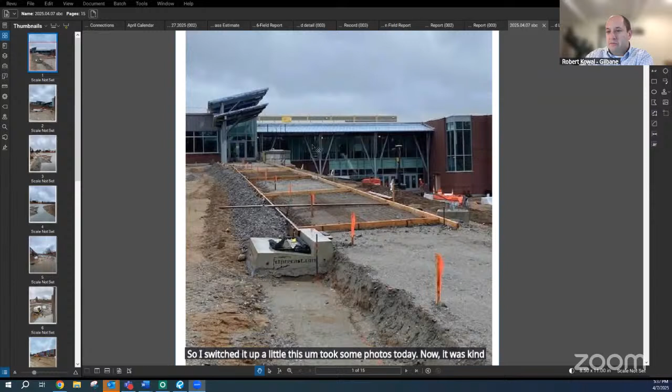So I switched it up a little this meeting. Took some photos today. It was kind of a rainy, not a beautiful day out there, but I figured we're moving along so quickly right now that if I try to share images from a week or two weeks ago, they'd be outdated and really wouldn't do it justice where we are.

So just starting outside, this is looking at the main entrance. We'll do a little tour on the outside and you'll see the progress we've made with the site work and finishes over the last couple of weeks. We have this sidewalk formed now and ready to place, going up to the main entrance. Behind me, we did the little ornamental stair, a stair down from this upper level to the lower level. That's all done and ready for railings at this point. So we're making good progress here.

We are working on these canopies. It's a little hard to tell, but this upper canopy is basically done with the metal roofing, and we're going to continue on. The roofers weren't on site today, but we're expecting them back, and in the next week we'll have the metal roofing done on the canopies surrounding the building.

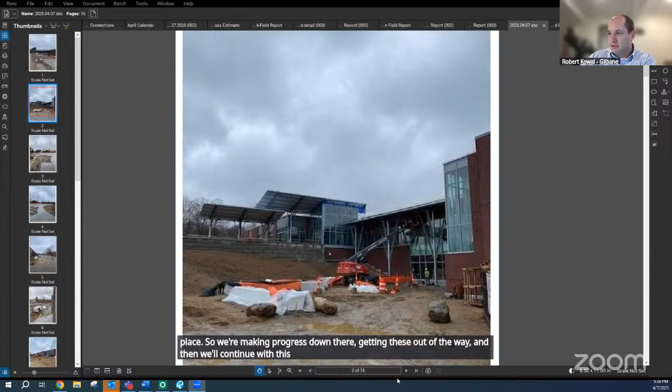Moving on, now this is looking up at the main entrance. It's a little hard to tell, but these items under the tarps and plastic are the ornamental bench seats, the seat walls down at the lower area by the cafeteria. These are actually installed and protected right now because of where we are construction-wise, but we've worked on the foundations for these and they're basically set in place. So we're making progress down there, getting these out of the way, and then we'll continue with this entrance area and the flat work and sidewalks required.

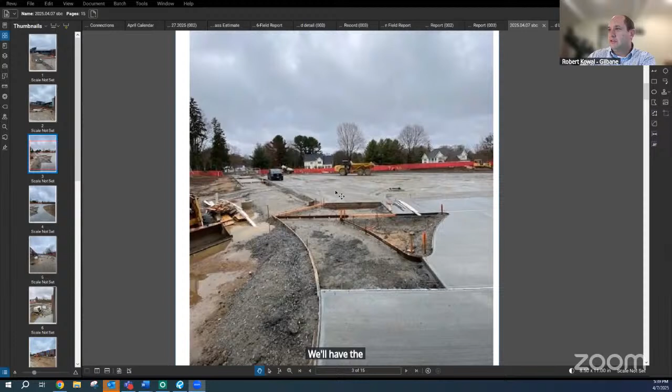So now I jumped over, and Mungertown Road is to my left right here. We're looking at the north entrance to the site, and what you can see here is more sidewalks placed. These sidewalks out to the main entrance will be done this week, weather cooperating, and we'll have the concrete in place. Through the parking lot, it's based out and basically getting ready, almost ready for pavement. We've been working on putting material in place and grading this, getting it ready for fine grading and prep for pavement.

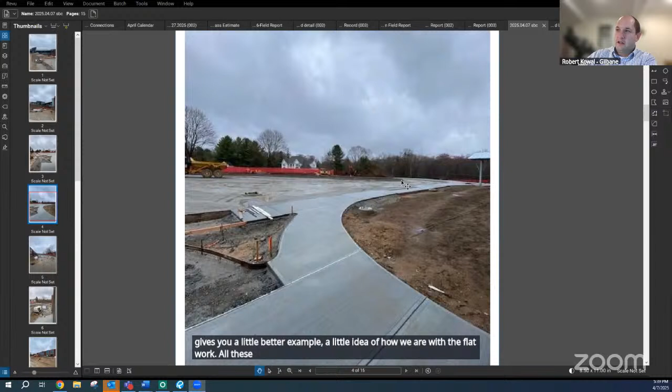Now this is looking a little to the right, towards where the well fields are in that lower area, and shipping and receiving. This gives you a better idea of how we are with the flat work. All these sidewalks are installed, and again the parking lot's prepped. You'll see in a future photo that the curbing around this radius area is done as well. It's a little hard to see in the photo, but the flat work and concrete is done.

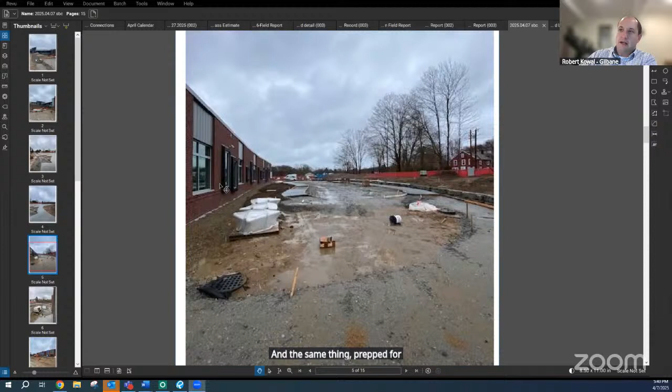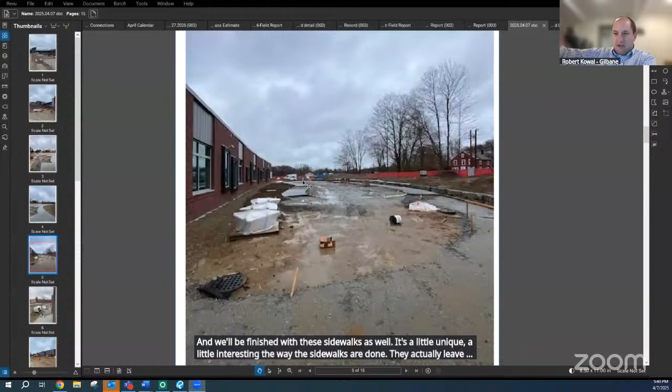Now I just spun 180 and I'm looking down at where the pre-K and kindergarten playground is, and the same thing, prepped for sidewalks. We'll be working on the last element here, these fiber cement surrounds on these windows, probably in about two weeks, but these should be done right around the first of May, and we'll be finished with these sidewalks as well. It's a little interesting the way the sidewalks are done - they actually leave out sections, almost hopscotch. They'll place a couple panels and then come in and fill in between them. That's why you'll see a break here, but there's a panel here and a panel here.

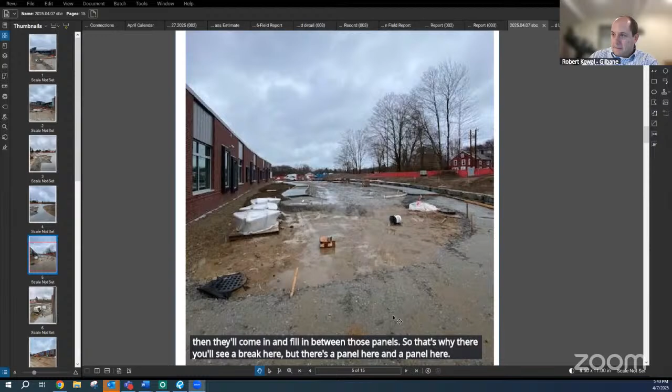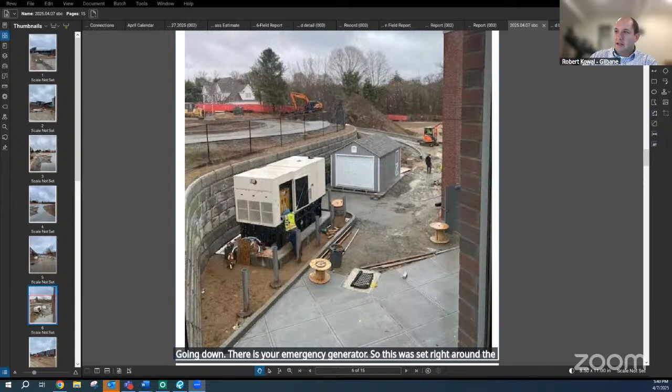Going down, there is your emergency generator. This was set right around the first of April, last week of March, and this shed was actually set this morning. So we have the shed on site. This is looking down at the shipping and receiving area, and if you look up you can again see the curbing in place, and we're getting prepped for the binder course of pavement.

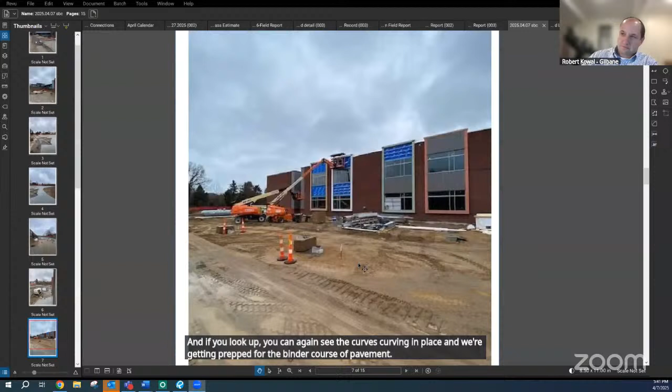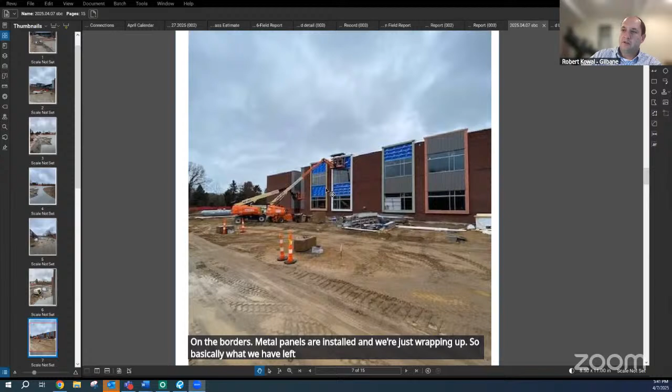So now I jump to the east side of the site. Daniel Hand is sort of basically at my back, and you can see that we're finishing up the exterior here. These are the fiber cement surrounds on the borders. Metal panels are installed and we're just wrapping up. What we have left is to finish these sections of metal panels, which should be complete by the end of the week if weather holds and we don't have any impact with really heavy rain.

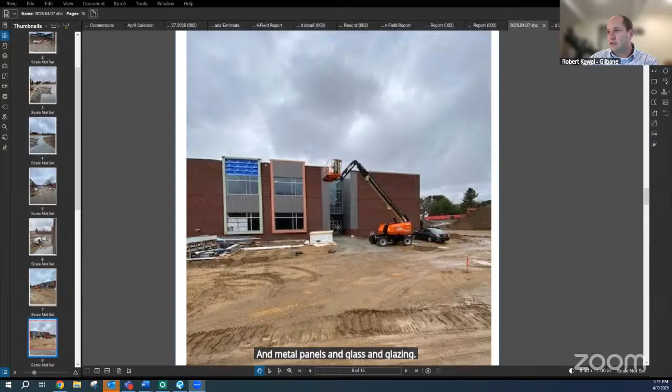And then this is just another example, gives you a little better shot at the entrances to that lower level and the metal panels and glass and glazing at the 2 entrances. Behind me, we're actually working on concrete down at the bottom as well. They're starting to form the concrete curbs that are required at the perimeter of the upper grade playground.

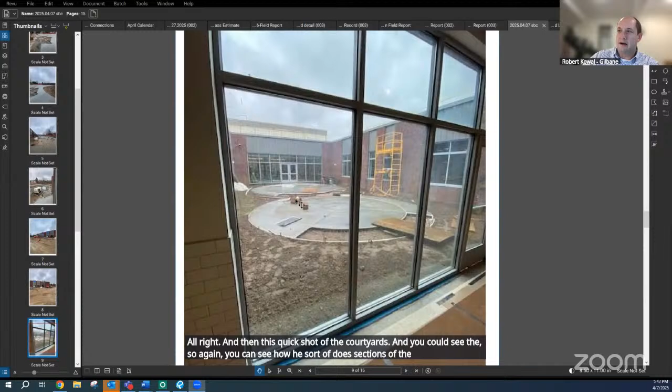And then this quick shot of the courtyards. You can see how he sort of does sections of the concrete. We basically have our last 2 sections left to place of the courtyard with the flat work.

So now I jumped inside. We're looking at the gym, and what these gentlemen are doing here are prepping for the fluid applied gym floor. You can see we installed the wall panels, the majority of the wall panels. We've put those in before so we didn't have to work on the fluid applied floor.

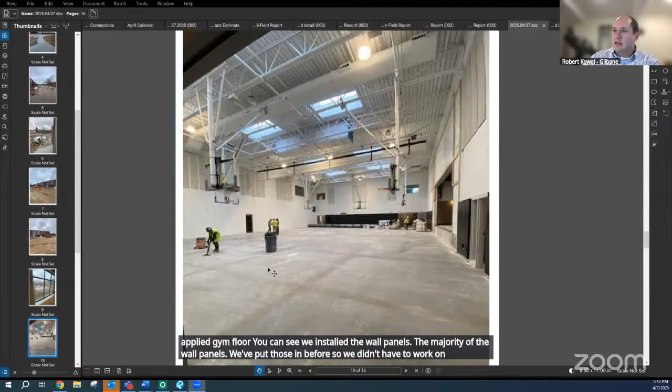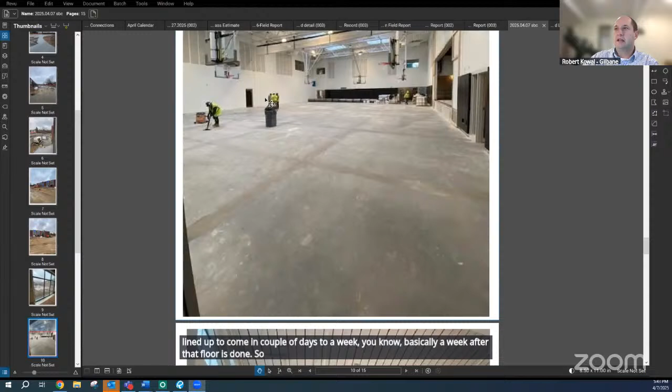In about the next 3 weeks, these gentlemen, the flooring crew, will be in here putting down this gym floor. That'll be a big item to have completed. And then we have the bleachers lined up to come in a couple of days to a week, basically a week after that floor is done. That's already been coordinated, and we have the date when the bleachers will come in and be installed along this wall.

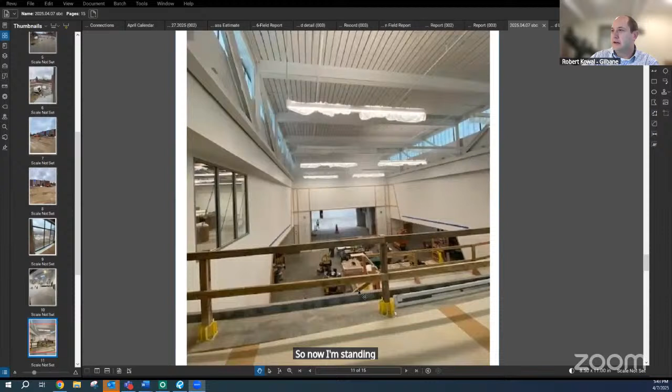So now I'm standing in the main corridor up on basically area A, looking down. This is the cafeteria. Just to give you a feel, permanent lighting is on, so these are the actual lights energized. You can see we're starting to do the finishes around the platform. When you're down in the cafeteria, you do look up at these acoustical wall panels and this acoustical detail that's on the wall by the platform. You can see the glass windows are in.

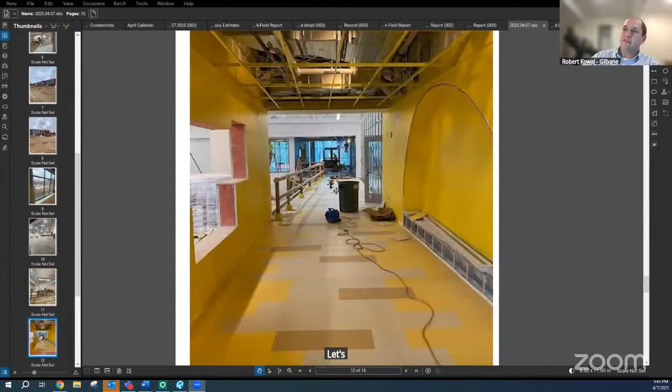I believe this is the art room here. You'll see better, but the floor is in as well. So now I was standing basically right by this trash can in the last photo, but this gives you a good shot at that main corridor.

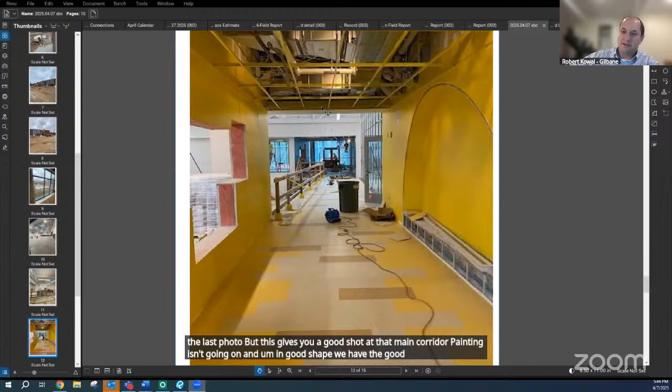Painting is going on and in good shape. We have the architectural ceiling tile and ceiling grid installed at both ends. This is a yellow, and then it's the main entrance by the main office. You'll see there's a blue architectural element, blue ceiling tile and grid at that location. And then you can see the floor.

So we're pushing right through the main level and basically getting down to the lower level with our finishes.

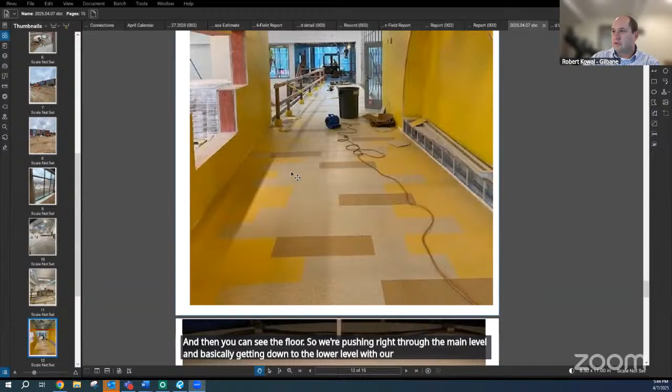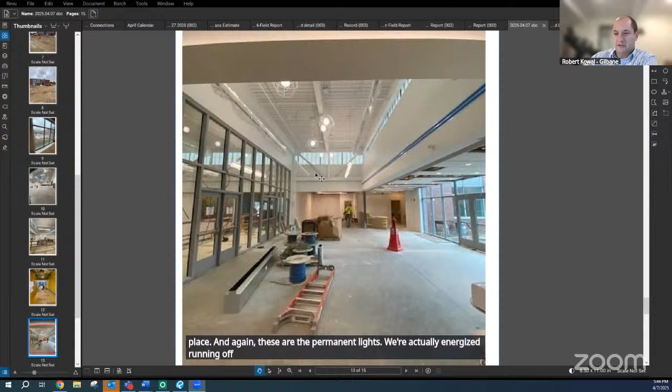And then this is a nice shot inside the media center. You can see we have a couple ceiling tiles out that we would just need to pad out as we finish, but you can see the glass storefront curtain wall in place. And again, these are the permanent lights. We're actually energized running off the permanent lights, which is important and a nice transition. Lets us get our temps out and gets us transitioned over to the permanent power.

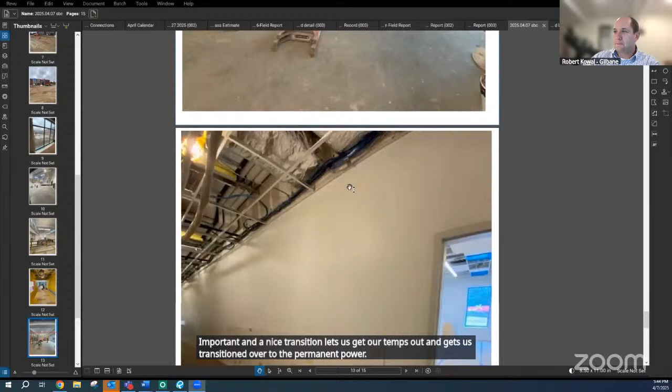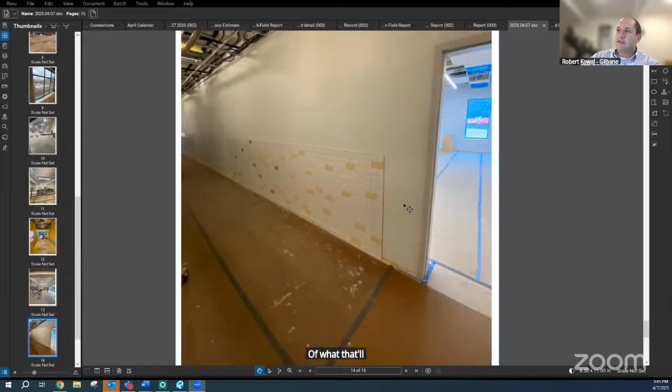We're working in the corners on the tile wainscot, so that gives you a little sample of what that'll look like. There's other architectural details, wall protection that'll wrap this opening here, so that's why you see the gap. As we get through, you'll see gaps where there's either the wall graphics with the local images, or if there's a marker tack board, there's different surfaces that break this up. That's why you see the kind of gaps.

We've held off on this wall protection in some of the final wall images and wall graphics that go on, just because it's like our last thing. In the last 2 weeks, we want to do that to minimize any chance of people working around it and just have the building on the actual permanent HVAC when we do those installations.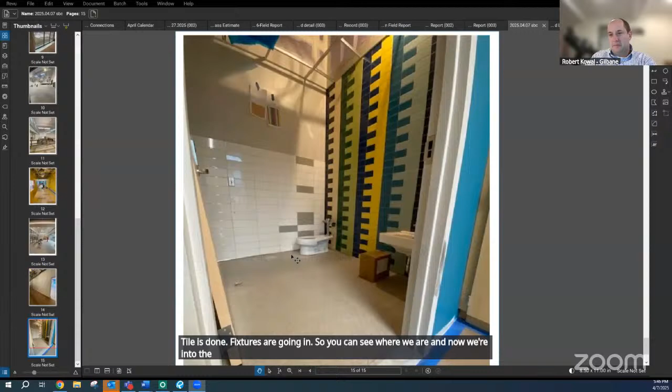Tile is done, fixtures are going in. So you can see where we are, that we're into the actual wrap-up finishes up through A and B, and kind of cruising into the lower B. Doors are here, majority of the doors too, so we're swinging the wood doors at this point.

That was my last slide. So I'll open it up and see if there's any questions or comments.

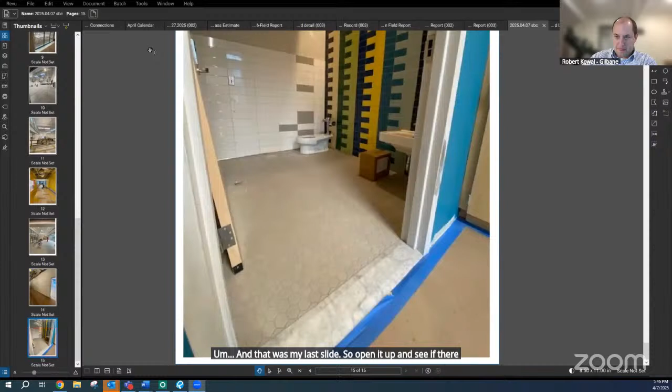It really looks great. Wow.

A lot of progress. If you come out each week, you can see the measurable progress now as we're pushing through to the lower areas and as parking lot areas finish up. So that's why, even though it wasn't the best day, we figured it was good to try to get you the current photos versus two weeks ago, because it does look different.

Definitely getting some rain. This rain is making up for all the good weather you had in the wintertime, but you're all inside now, right? Yeah, mostly. It just wouldn't stop today. I thought it was supposed to stop in the morning, but it just kept drizzling. So, but we just keep pushing on.

Got any other questions before we turn it over to Adam? Okay, Adam, you're up. All right.

So in typical fashion, as construction's moving along nicely, a lot of what Di and my team have been working on are some of those next phase items, to get them prepped so they're ready by the time the project is ready for them. Namely, as Justin mentioned, some of those smaller direct purchase type FF&E items, working with Art Sickle and his team on some of the smaller bits and bobs they might need for the kitchen, as well as some of the vestigial AV and IT things, like one-off displays and things like that.

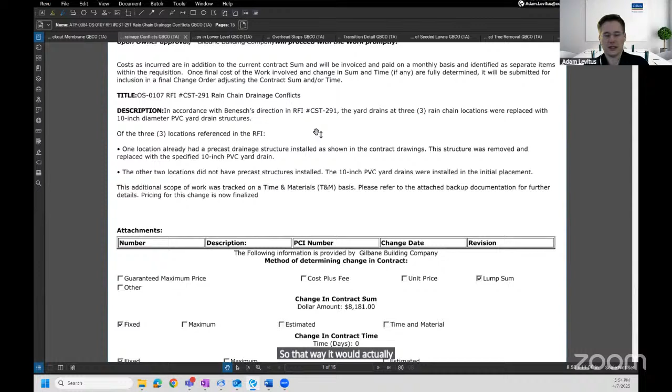ATP 84 is for just over $8,100. This is the item Sharon mentioned at the beginning of the meeting for the rain chain conflicts. Essentially, there were locations where the drainage structures came down, and where there was supposed to be a drain, it conflicted with the footings for the canopy. So a different product needed to be put in place there, so that it would actually work and be configured appropriately, allowing connection between the roof canopies and the underground stormwater system.

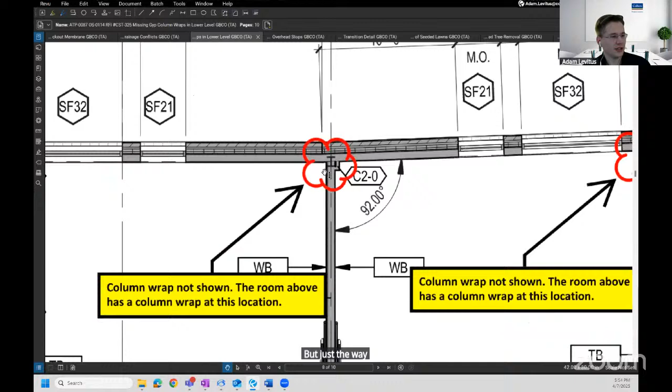ATP 87 is for just over $1,800. There were a number of classrooms at one level of the building that didn't have column wraps. I'll show quickly on the screen what we're talking about. The way the drawings were shown, the box out was shown in one room but not the other, and on the floor above, the box out was shown. So basically you would see the steel in the classroom if it was built per the drawings. This change reflects the additional bits of drywall returns to cover those at the affected classrooms, so that it's properly hidden.

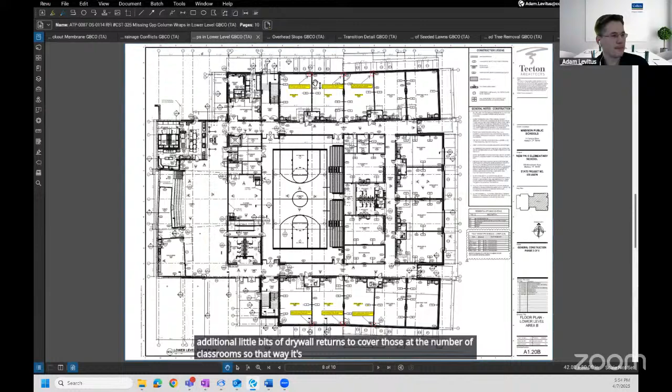ATP 88 is for just over $900. There was an issue with the door hardware schedule where one product was called out for the overhead stop for the door, but it needed to be a different product based on geometry. That swap cost an additional $900 to make the correct change to the correct product for the stops so the doors could physically close appropriately.

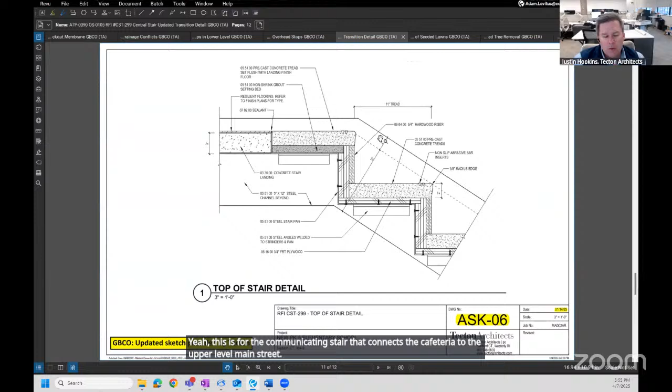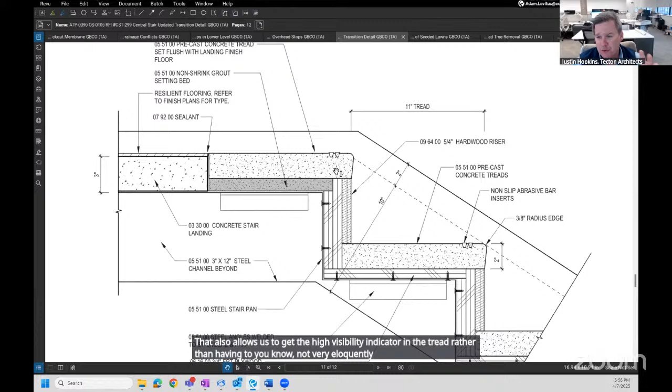ATP 90 for $2,150 is for some precast concrete treads. Justin, do you want to quickly explain this one? Yeah, this is for the communicating stair that connects the cafeteria to the upper level Main Street. The proper way to provide these precast treads is to have your upper tread be part of the miscellaneous metals, with the associated precast tread flush with the slab on deck. The drawings had the slab on deck going as the top step. What we really want to do is make sure that the tread at the same level as the floor, at two locations, has the same profile. That also allows us to get the high visibility indicator in the tread rather than not very eloquently treating that in the slab on deck. So this was a change in scope associated with this change. We think it's for the betterment of the project and the finished condition.

Because the original slab on deck came all the way out, correct? Yep, Justin just pulled it back and provided a tread.

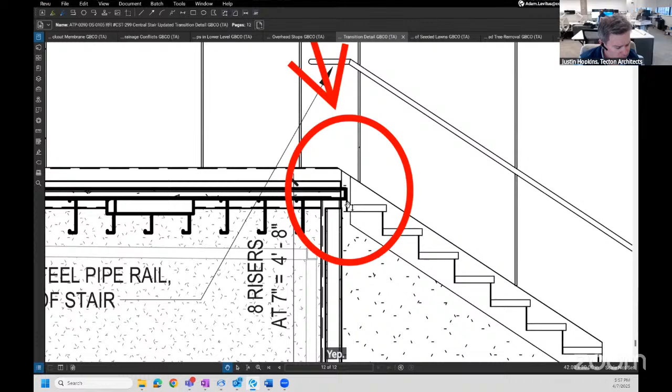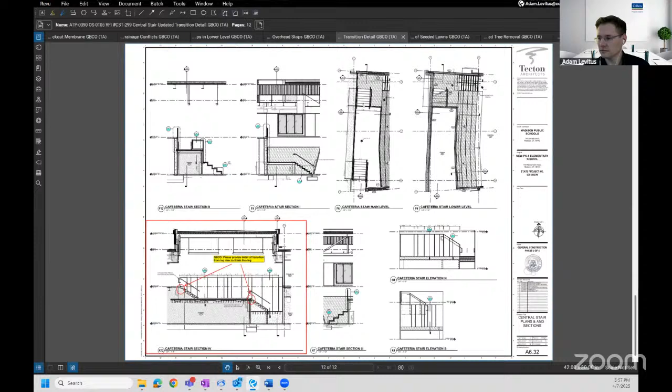Let me pause there because the remaining two ATPs have a little bit more narrative to them. So let me pause to see if there are any questions or items on ATPs 83, 84, 87, 88, and 90. No? Okay, good.

ATP 92. This one is actually not a change order. It's an ATP, but it's intended to use construction manager's contingency. And because it's over $5,000, that requires SBC approval. The amount is $48,853. Again, this would not be coming out of owner's contingency like the other ATPs would.

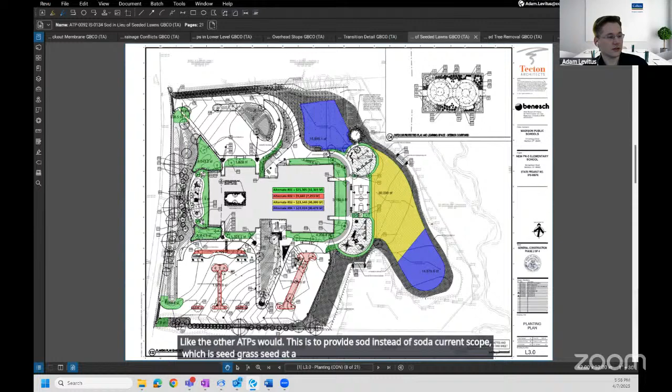This is to provide sod instead of the current scope, which is seed, grass seed, at a number of locations throughout the site. So you can see this multicolored scheme here - this reflects all the areas that were discussed in the trailer. This ATP would be for the green and yellow areas only. The intention here is to provide sod at these locations instead of seed, so that when school opens, those areas have grass that's usable rather than waiting for seed to be established.

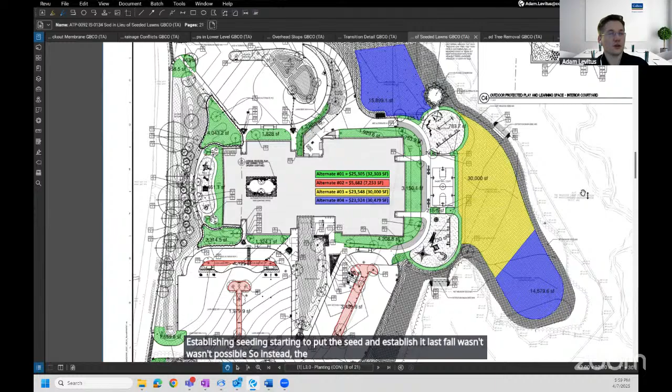Earlier in construction, there was the intent to try to seed these last fall to help avoid a situation where there wouldn't be grass on day one. But there was, if you recall from a while back, some issues with getting the permanent water to the site, based on some of the detailing with Connecticut Water, the utility provider. So establishing seeding last fall wasn't possible. So instead, the notion was to put sod here, and this way there's an area just east of the playgrounds that can serve as the play field.

There'd be some snow fencing to help block off some seeded area. Then all the areas around the building in green here where there's going to be high traffic, especially as people are moving in and out, kids are cutting across the lawn to get to the door, there's actual lawn there as opposed to seed that's trying to get established but having a tough time because it's getting trampled. The red and blue areas were also considered, but there was a weighing and measuring of what the added cost is worth.

Ultimately, all CM contingency that's unused comes back to the owner. So this isn't just a matter of somebody else paying for it, let's just do all the sod - it's all the town's money and scope. So this appeared to reflect the best value on providing the scope around the building, and we're providing a play area without just adding in a bunch of extra cost. So that's what this ATP is for, to authorize Gilbane to use their CM contingency for this change.

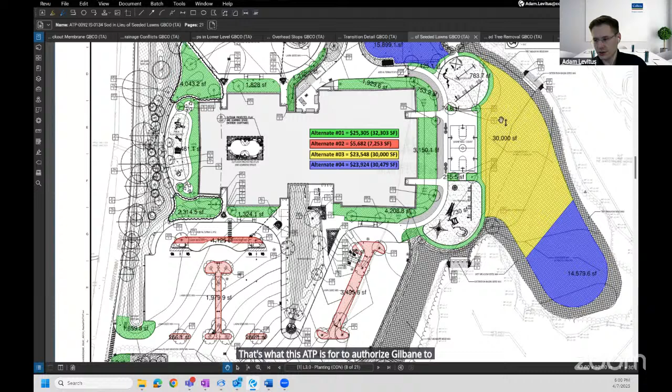The other ATP up for vote is for just under $17,000 for tree removal at Mungertown Road. If you've driven past the site, there are a host of trees that were originally intended to remain along Mungertown. We recently had, through facilities, an arborist and the tree warden come out to take a look at them based on site activities, utility installation, and the sidewalk installation along Mungertown. Those were flagged as damaged and targeted for removal.

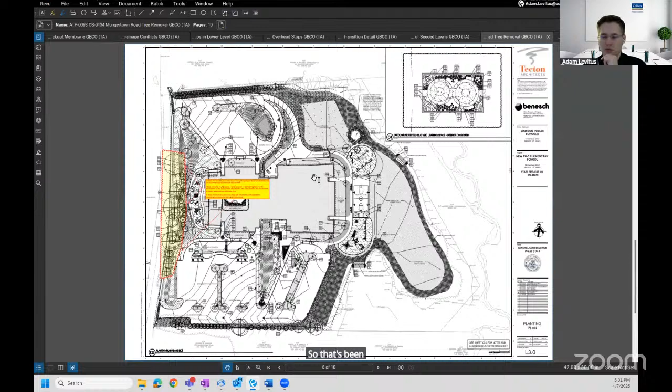So that's been cleared through the town processes. The notion is that as part of this ATP, those trees would be removed to remove any concerns about dead trees or safety concerns, what have you. This is coupled with another item I'll mention now, which we'll call the rock wall - a rubble wall along Mungertown Road that's got a lot of weeds and whatnot.

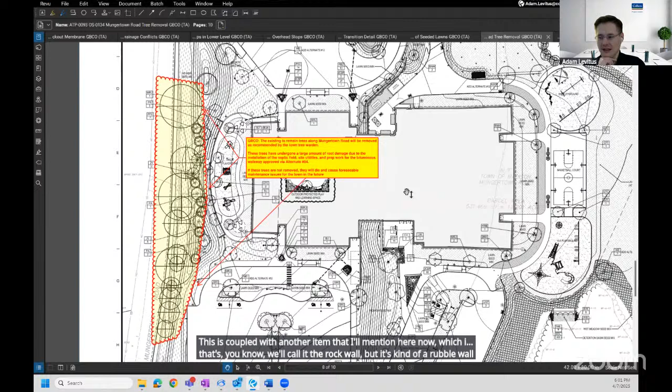As the sidewalk's being installed, we've done a number of walks out to the site - here's the wall, so to speak. We're working with planning and zoning to confirm if there's any exception on the town land use perspective to remove these rocks and allow this to just be an established soil and seed area.

So that way on day one, anyone approaching the school, you don't see a bunch of potentially dead trees, this kind of rubble wall, and a bunch of weeds. It's nice and clean on the new school and the new frontage sidewalk.

So again, this ATP that's up for approval tonight is for the 17,000 to just remove the trees. I would ask for the committee's consideration to allow Peter and George to potentially approve an ATP outside of the committee for cleaning up the rock and removing it and regrading the area there as part of a separate effort.

The current rough estimate for that is a little over 30,000 — I think it's around 32,000 is the estimate they're working with. But that would be contingent upon planning and zoning confirming that that's an acceptable cleanup effort to take, based on the land use approvals the project has so far.

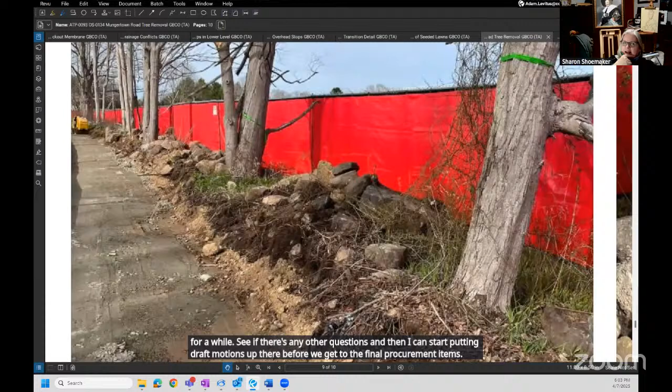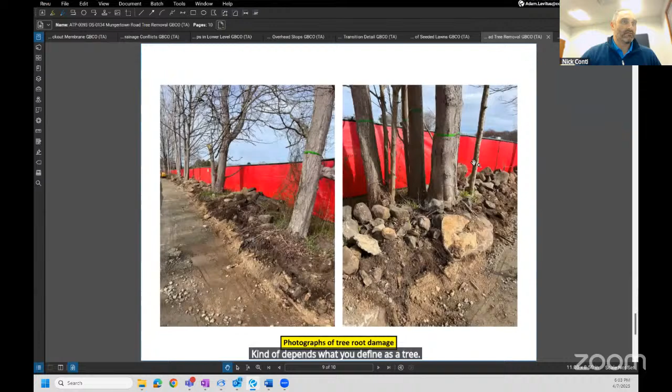I don't have an exact number listed, but it's a fair number. It's all shown here on the plans with these crosshairs. Kind of depends what you define as a tree — some are smaller than others, some are dead, some you don't know if that's a tree or not. Is that 3 trees or is that 7?

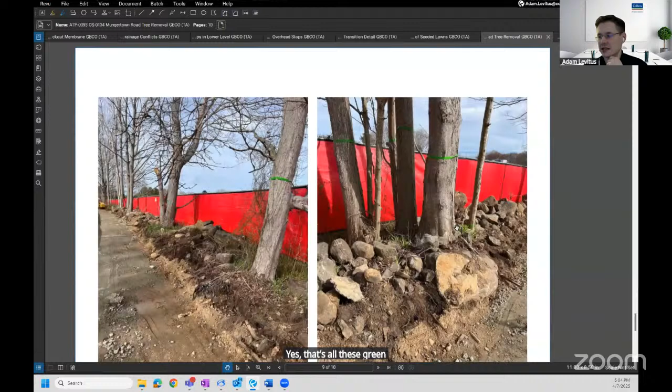Got it. But the arborist — the town arborist — has blessed these, yes. That's all these green tags here. Those were marked as part of that tree walk through the town.

Adam, do you want to highlight some of the trees that are being replaced on the berm? Yeah, so basically once these are removed and this is cleaned up, you'll still have new trees installed as part of the project.

This is on this graded berm separating the sidewalk and the road from the pre-K area. So this raises up — I forget how many feet, I think these are one-foot contours, but it's several feet up in the air — and then you'll have trees on top of that, providing that visual barrier and physical separation between the road and the pre-K playground. Obviously the construction fence is blocking the view right now, but once it's gone, you'll have a nice view of the landscaping and then the building.

I think that's a really smart move. A lot of those trees were damaged pretty heavily and were going to come down and die. And it gives a lot to those new trees to become established without competing with those other trees that were there.

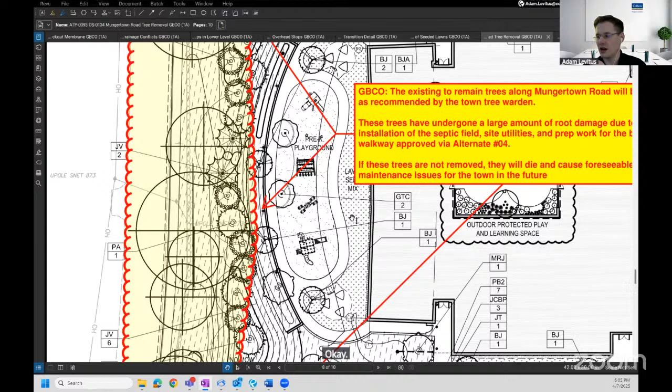Are the stumps coming out with those, Adam, or what are they doing with the stumps? So this ATP would just be for cutting, because when you start removing the stumps, you're also touching the rocks that need to be checked to make sure they're okay to move. So that 30-something-thousand rough order of magnitude would contemplate removing the stumps and the rocks in one go as part of the clearing exercise in that second effort.

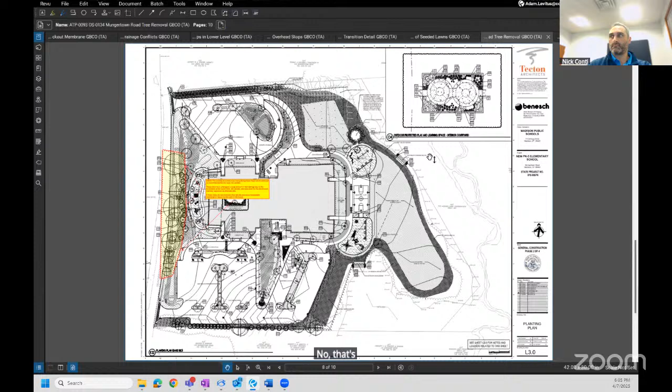I thought in the paperwork there was a separate line — like 9,000 for the stumps — so that's included in the 32 you mentioned? If Nick or Rob can correct me if I'm wrong, but yes, that would be in the second effort. This would just be for cutting and hauling off the trees themselves. Is that right, Rob? I don't recall off the top of my head. No, that's correct — the ATP currently presented is just for cutting the trees.

Yeah, but somewhere in the paperwork it said there was like 9,000 for stumps. Yes, I think this would be removal or whatever — part of the 30, if approved. So that's part of the 32 you were talking about? Correct, yes.

I was thinking it was separate, and I'm thinking, wow, that's a lot. Yes, I think this 13 here — Gilbane obviously got a quote all at once — but that 13 ties to this 13 here as part of this ATP, and then the other 8 and 1 would be part of that separate effort.

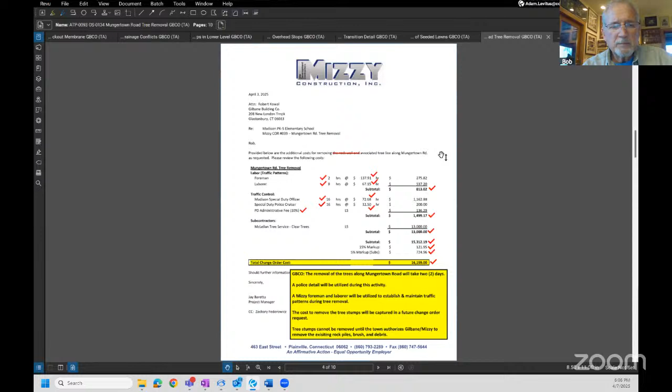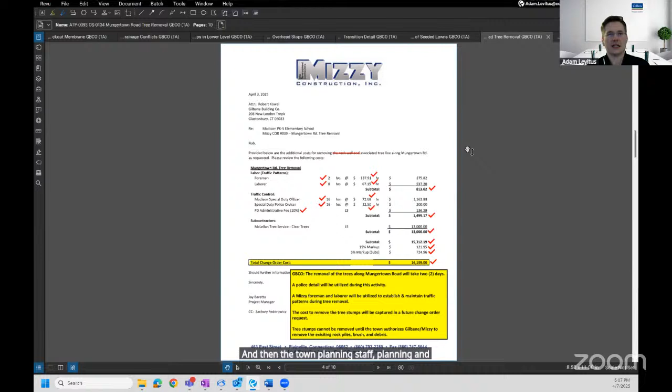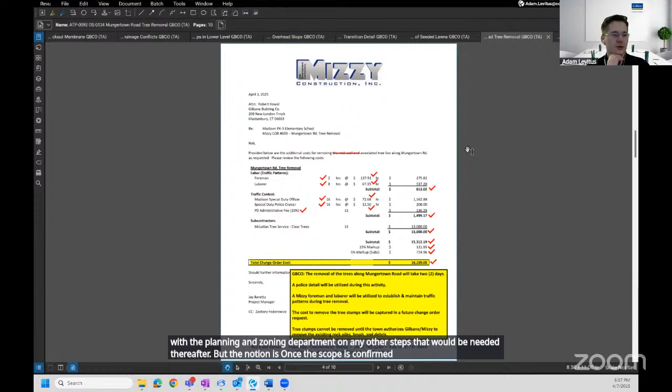Explain the process for planning and zoning approval. Currently this topic is scheduled to be brought up at the ACA meeting tomorrow night to get overall consensus on the visual component. Then the planning and zoning staff would coordinate on any other steps needed thereafter. The notion is once the scope is confirmed as acceptable to planning and zoning, they would notify myself and Gilbane, and we could execute the ATP and conduct the work to remove the stones. Just want to make sure we're all above board on what's happening up front, since it's part of the overall land use approval.

And if they don't approve it, we're off to plan B at that point. There's been, anecdotally, support when I've had site walks with multiple members of the project team and town staff. So I'd anticipate that support would continue. But if there was big pushback or opposition, we'd need to regroup on what the scope would be. The trees themselves have already been reviewed by the arborist and tree warden for health, safety, and nuisance concerns, separate from the planning and zoning land use component, which the rock wall is more germane to.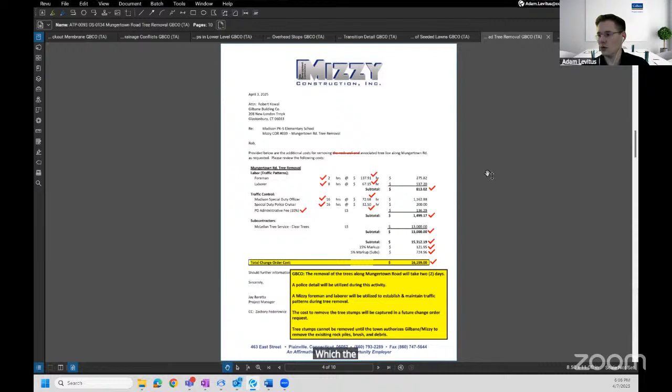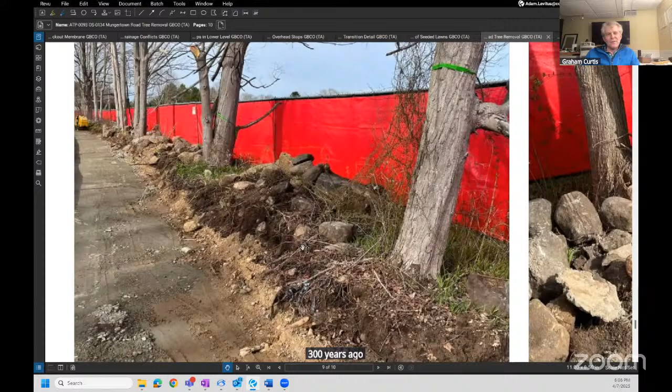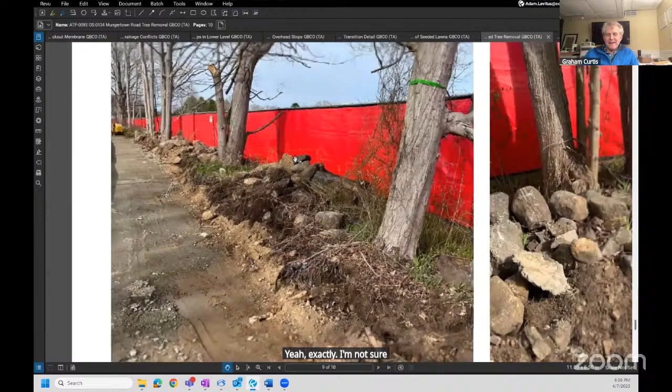We should have never called it a rock wall in hindsight. Everyone felt the concept of a wall was never really there. I don't know that I would have called this a wall, but the surveyor did, so that's why it got the wall moniker initially. I'm sure it was a great wall 300 years ago - not so much today. I'm not sure it would have stopped a Revolutionary War bullet, but I don't think the neighbors were particularly concerned about it. My recollection was the neighbors were only concerned about the sidewalk. I don't think they knew there was a wall there, but since they lived there, they knew there was no such thing as a wall.

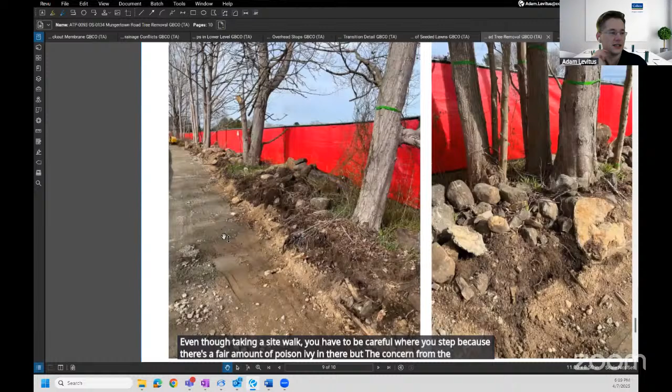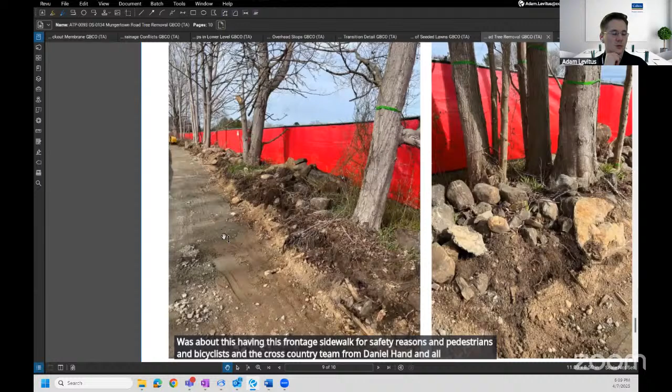In spring and summer you can't see any of this because the weeds and poison ivy take it over. Even on a site walk you have to be careful where you step because there's a fair amount of poison ivy in there. But the concern from the neighbors at our outreach meeting was about having this frontage sidewalk for safety reasons - pedestrians, bicyclists, and the cross country team from Daniel Hand. So that's where their focus was, making sure this was there for safety reasons. There was no discussion about the wall that I recall.

The material, just so everyone's clear, is a concrete curb and asphalt walk. Is that still the plan? I know there's been discussions about changing that, but that's still what we're doing. It's an asphalt walk, and I think it's concrete curb along the road, asphalt walk.

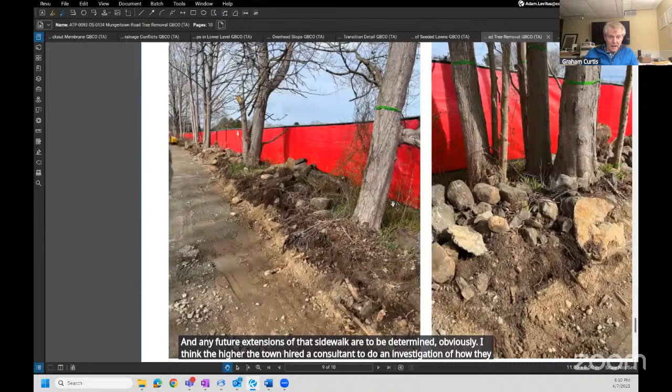Any future extensions of that sidewalk are to be determined. The town hired a consultant to investigate how they could possibly connect this frontage to other schools or elsewhere, but that's outside our scope. And the state's not paying for this anyway - they're not paying for offsite sidewalks, correct, outside the property line, so it's ineligible. The scope we're following right now is exactly as was approved through the planning and zoning process, as that alternate. So we're checking the box on what's been approved so far to meet the requirements for the job.

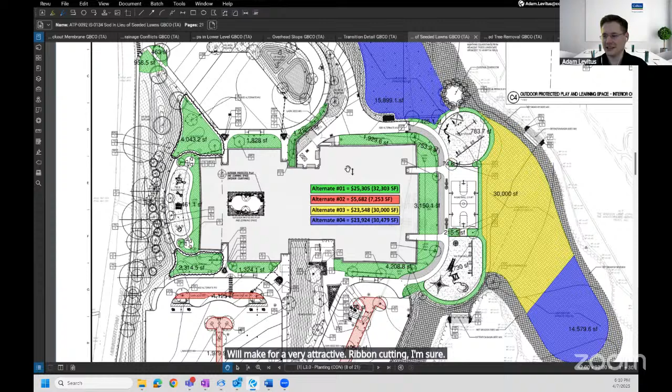So you want to discuss the turf establishment component? It's not our money, quote unquote, but just want to make sure no one has any questions. Will make for a very attractive ribbon cutting, I'm sure. And functional, with the kids having some place to play.

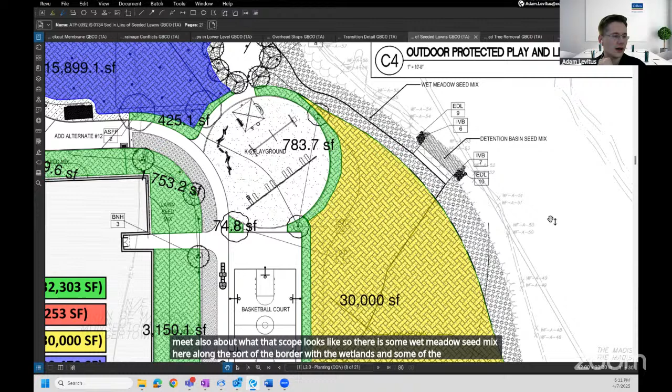And then the pollinator pathway, that gray area, would be the wildflower strip that's envisioned. We're working on what that scope looks like. There's a wet meadow seed mix along the border with the wetlands and some of the stormwater provisions required as part of our stormwater design for water quality going into the Neck River area. I'd imagine something along this area outside of the turf, in this zone with the meadow seed mix.

And Bob Gupta is working on a plan as part of that and working with the land trust. So if anybody in the land trust is watching, we haven't forgotten.

So do we want to take the votes now? Is there any discussion on the turf? Bob, you want to weigh in? I mean Bob London, not Bob.

I guess my only question is, is it going to be irrigated? No? Okay, well we'll put temporary sprinklers as we establish it. So during establishment, yes, but there's no permanent irrigation as part of the project scope.

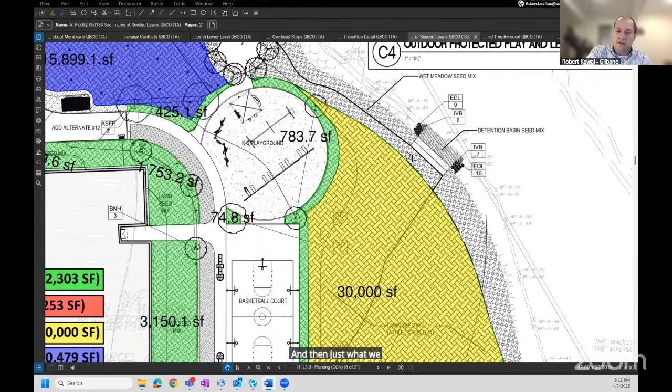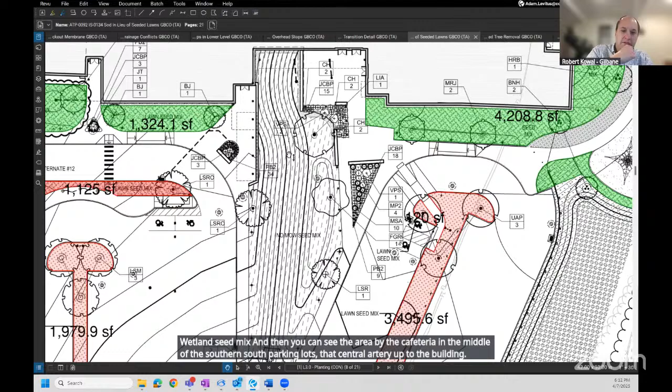And then just what we targeted is the areas—if Adam zooms out a little bit—the borders in the gray that we didn't shade, that's all wetland seed mix. And then you can see the area by the cafeteria in the middle of the south parking lots, that central artery up to the building, that's a no-mow seed mix. That's a little different than the typical seed mix around the building and in the playfields. And that's the same no-mow that's around the berm and by the main entrance, the Mungertown Road frontage. So that's why you see those areas not highlighted—they're a different seed mix.

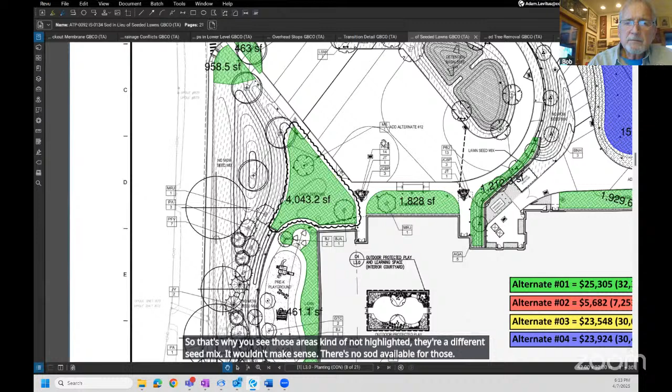It wouldn't make sense, there's no sod available for those. So there will be areas that get the no-mow seed mix. Got it, so you have to knock that down once or twice a year. Yeah, correct. I don't know that Peter's team would want to be mowing up on the side of a steep hill over here, so it's a good targeted location for the no mow.

It makes for entertainment, the guy with the lawnmower on the string method.

Okay, so I guess we can move to the motions. Any discussion of the frontage before we go to the motions? Just want to make sure there's a lot there, so want to make sure everyone has an opportunity to comment.

Hearing none, we'll move over to the motions. Would you like me to read those for you, Graham? I would be thrilled if you would, Sharon. Guess that's my job, all right.

Motion to approve ATP 83 for the change to Gilbane's existing construction contract in the amount of $6,358 for fiber cement panel blackout membranes per RFI 327. Do we have a second? I'll second that. All in favor? Aye. Aye.

Motion to approve ATP 84 for a change to Gilbane's existing construction contract in the amount of $8,181 for revised rain drainage structures per RFI 291. Have a second? Thank you, Woody. All in favor? Aye. Aye.

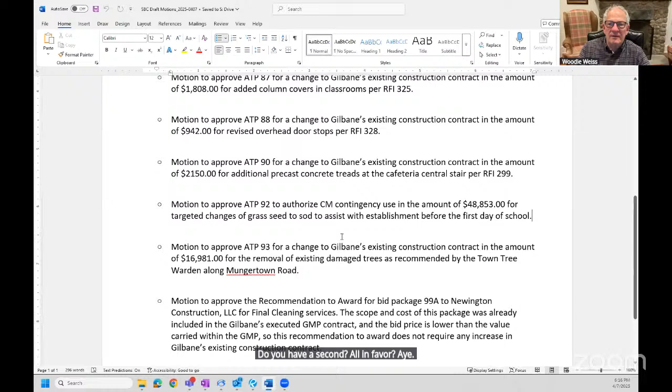Aye. Motion to approve ATP 93 for a change to Gilbane's existing construction contract in the amount of $16,981 for the removal of existing damaged trees as recommended by the town tree warden along Mungertown Road. Have a second? I'll second that. All in favor? Aye. Aye.

All right, motion to—this one I haven't talked about yet.

Oh okay, I'm just reading along. Sorry. Nope, it's all good.

Before I mention this last one, was there any exception taken by the committee to potentially having George and Peter review and approve an ATP for the 30-some thousand dollars of rock removal in between meetings? It's just more than that $10,000 limit, so I wanted to mention it here in the public meeting. That includes the stumping as well, and would be contingent upon planning and zoning saying it's okay.

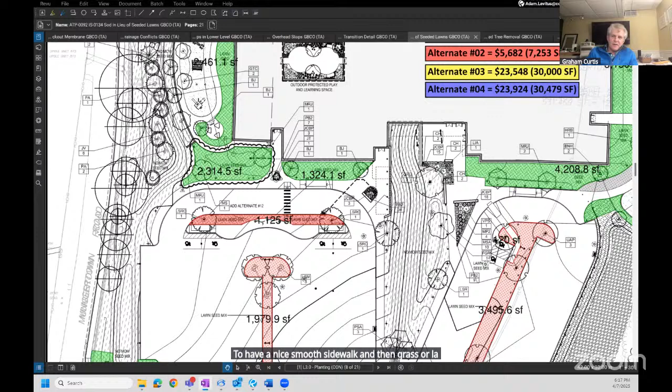So it's basically cleaning up everything that's left after the trees are gone. Correct. We'll have a nice smooth sidewalk, then grass or lawn leading up to the berm with trees, and then the building in the background. Okay, beautiful.

Any discussion of that? Is everyone on board? I don't know if we need to make a motion for acceptance or just an understanding. Probably an understanding is fine, it seems pretty clear. Hopefully zoning approves it and we can move quickly to complete so we can do this turf establishment at the same time.

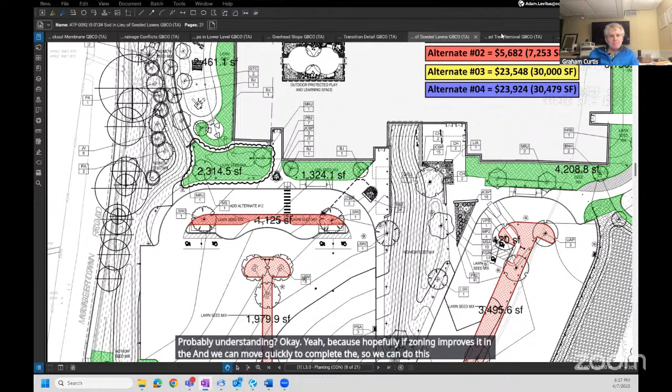That last motion that I had up on the screen is with regard to a recommendation to award for final cleaning.

Way back when we had our initial guaranteed maximum price document with Gilbane, there were a host of allowances and CM contingency items and buckets of money categorized for different things. One of the items within their site services portion of the contract was the amount for final cleaning as a separate bid package. This was anticipated at about $120,000, so it was put out to public bid to solicit vendors to do the final cleaning of the project before it gets turned over to the owner, being the town. Those bids came in.

The lowest responsive bidder was Newington Construction for $88,768, less than the anticipated amount. So this is pretty similar to what we just did with the CM contingency authorization, where the school building committee is authorizing Gilbane to award the contract to Newington within the site services portion of the GMP. Because the dollar value came in within that bucket of money, there's no added cost, so it's not even a change order — it's just confirming it's acceptable to enter into this contract between Gilbane and Newington. That's why this motion is up for approval, so they can get them on board to do the final cleaning services.